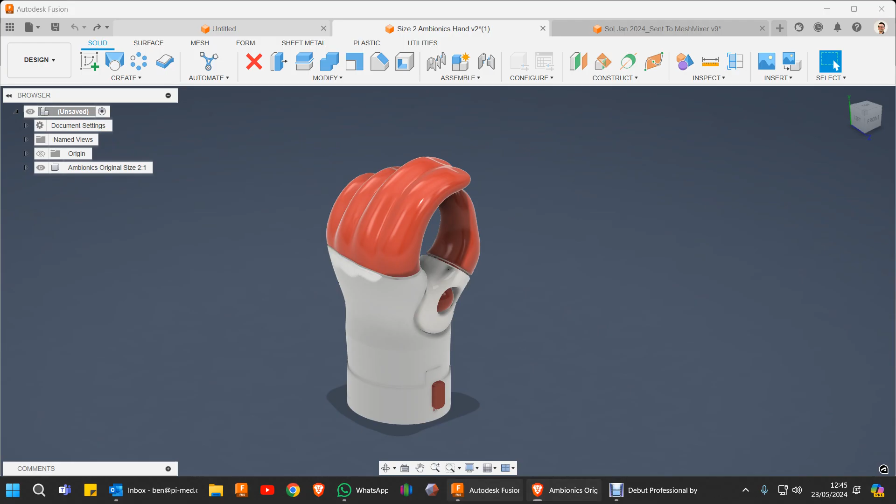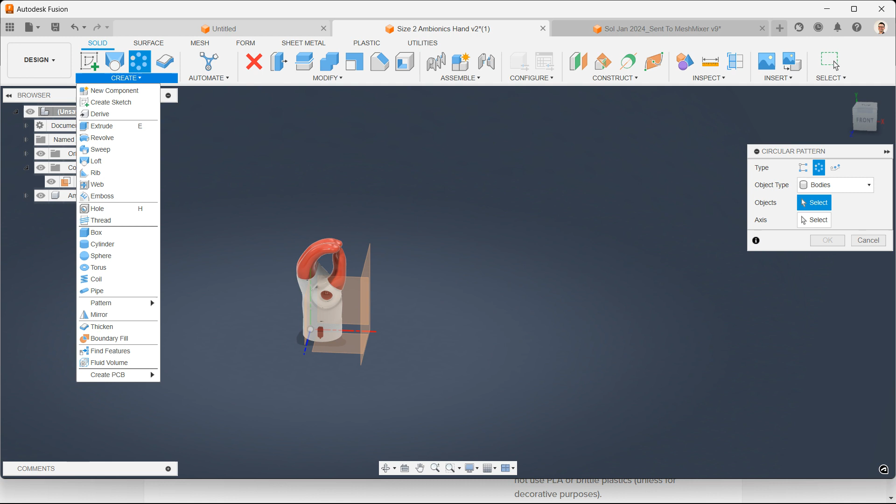So the first thing we need to do is align it and mirror it if necessary. Now I always make arms for Sol, he's left-handed, you might need a right-handed socket. So in order to do that, just quickly mirror it. So bring up the origin, offset a plane that's some distance away from the object, and then you just come up here and create mirror. Select the component that you want and then the mirror plane.

So that works for the split hook equally, and there we have it. So that would give you the mirrored version. We're working with the left one today, so that's the one we're going to proceed with. What we need to do now is to align it. It comes in basically as if it was on a 3D print bed.

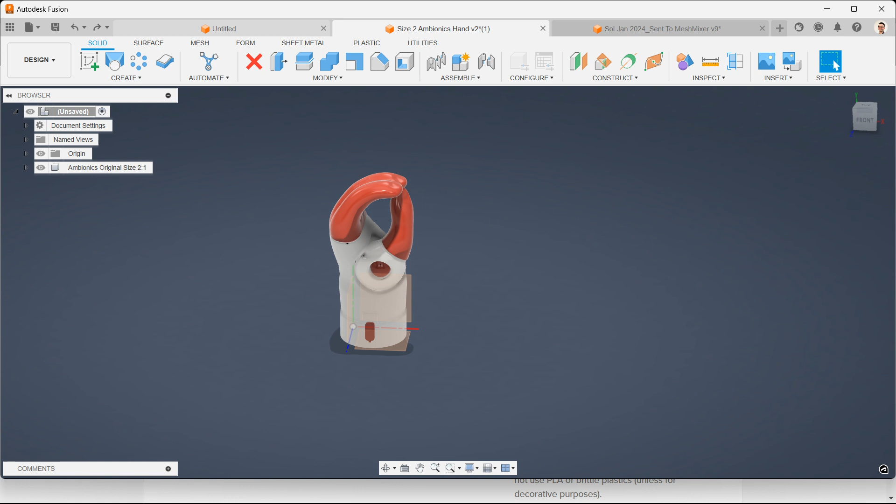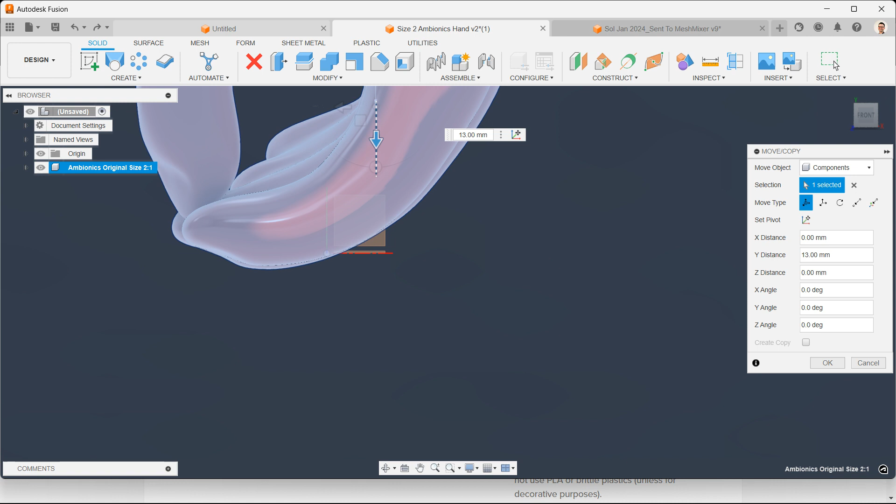What we need to do now is turn it upside down for the modeling. So select the component, hit M for move, and then just turn it through 180 degrees. And I like to bring it down so that the tip of the thumb is on the ground plane. And that will be obvious why I'm doing that in a moment. Roughly there. That's about right. Okay.

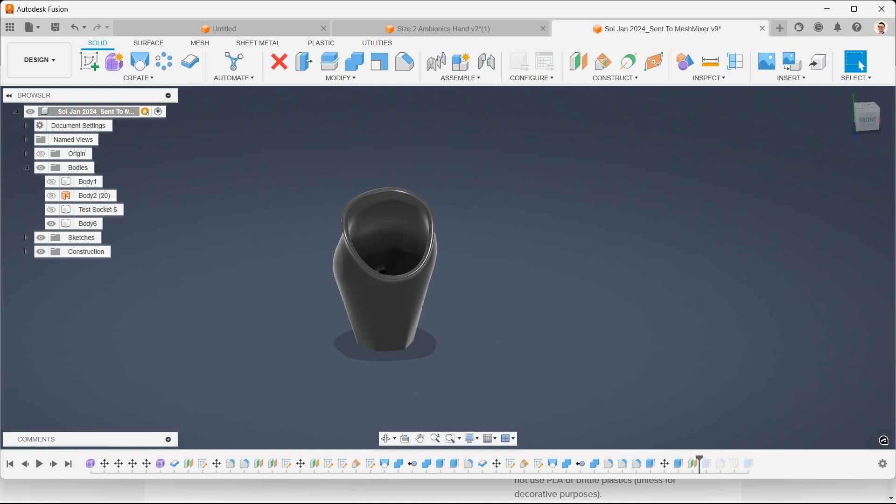Once we've done that, we bring in the target geometry from the socket that we've already modeled. So you might have taken a cast or done a 3D scan and then followed the process to create a socket like this. So here's one. This is actually the socket that Sol's wearing today. He uses a completely different system, so I use the PVC tubing. But for today's purposes, we're going to use the socket geometry.

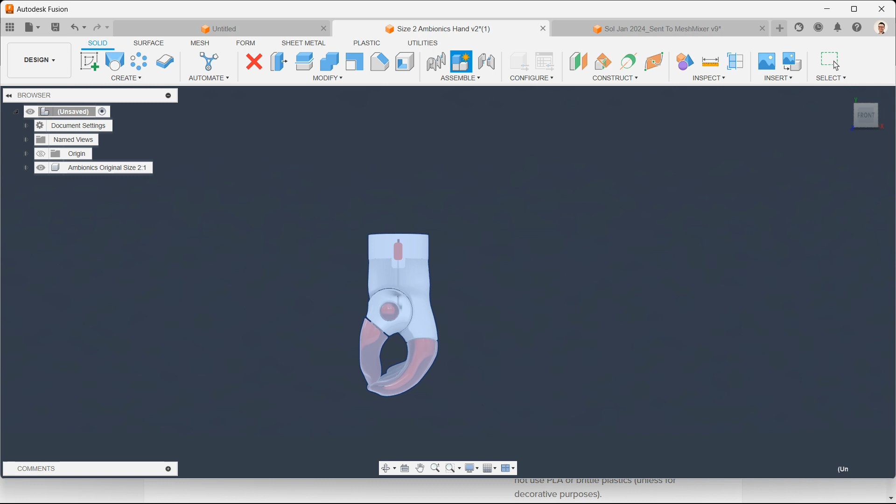So take the 2D surface that you created, copy it, come back to the folder that you've just opened, and this is important. So right click on the top and select do not capture design history, click OK, create a new component, doesn't matter what you call it, and then right click on it and paste the geometry that you want. OK, and then go back to the parent component and capture design history. So now everything we're going to be doing is going to be parametrically modeled.

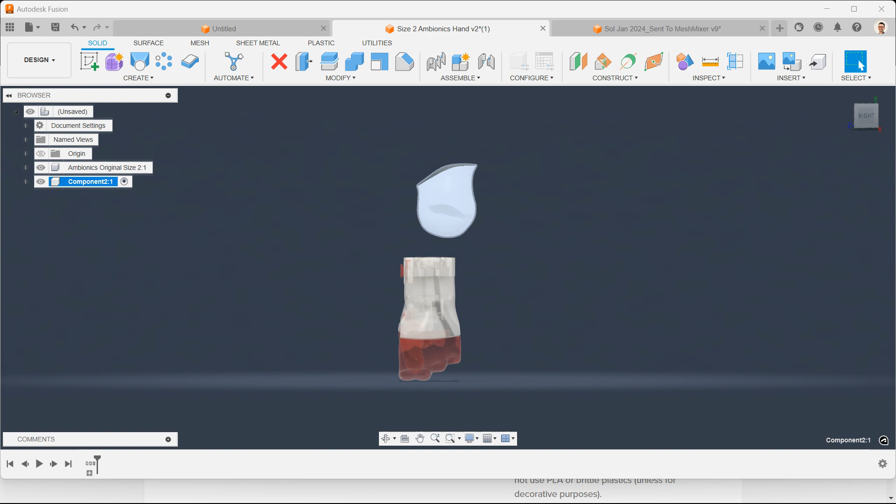Right, so we've got our socket. It's not quite lined up yet, so let's do that next. So we pick the component, hit M again, and just roughly center it above the hand. Looking from the front view, you want to center it so that the apex or the bottom of the curve for the socket geometry is somewhere lined up over the release button, about there. Okay.

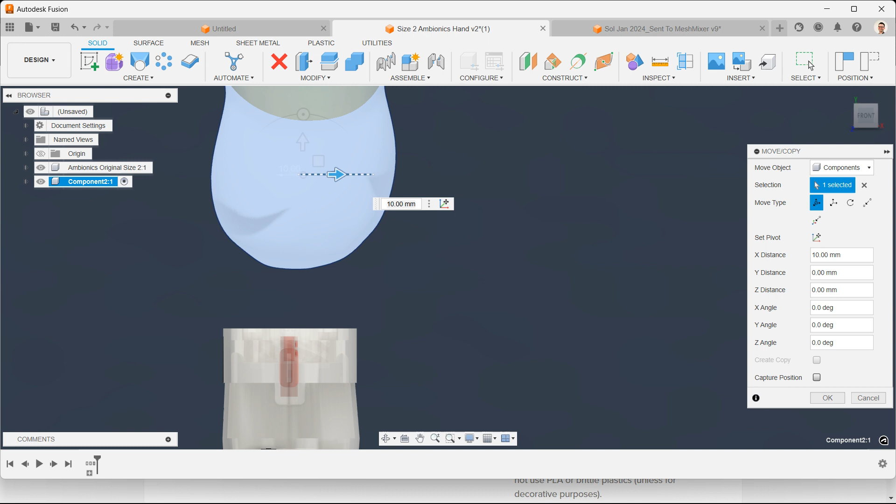Next, what we need to do is create an offset plane to give the distance from the crease of the elbow. So Sol has a very short below elbow amputation, but he does have a crease, and that's the point where the anterior trim line on the socket goes. So that needs to be in the corrected state.

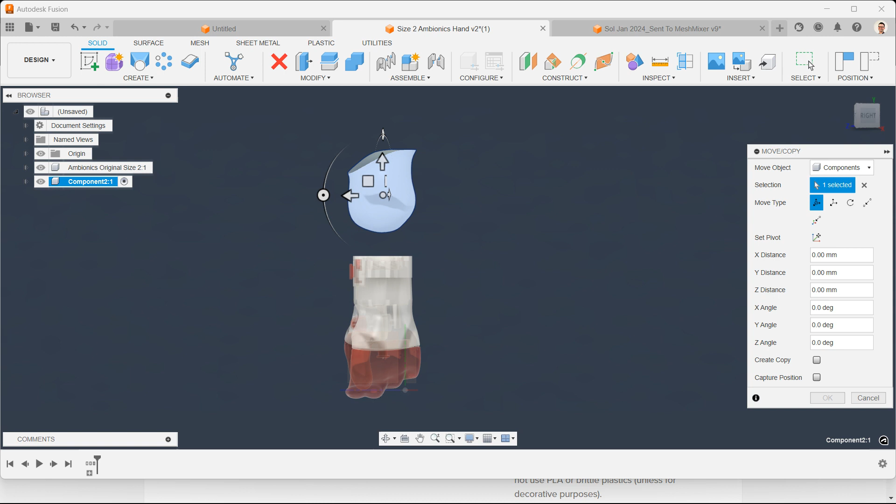So we'll pick the model again, hit M one more time, and I rotate my sockets around about 25 to 30 degrees. So what this will do is give a more relaxed position when it's being worn. The arm would never be 180 degrees. Nobody walks around with their arm completely straight. It should be roughly anywhere between 20 and 30 degrees to be comfortable.

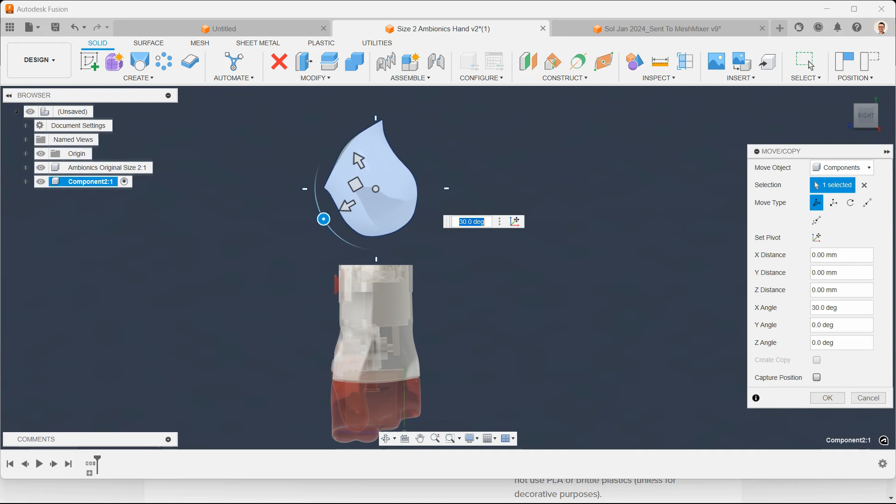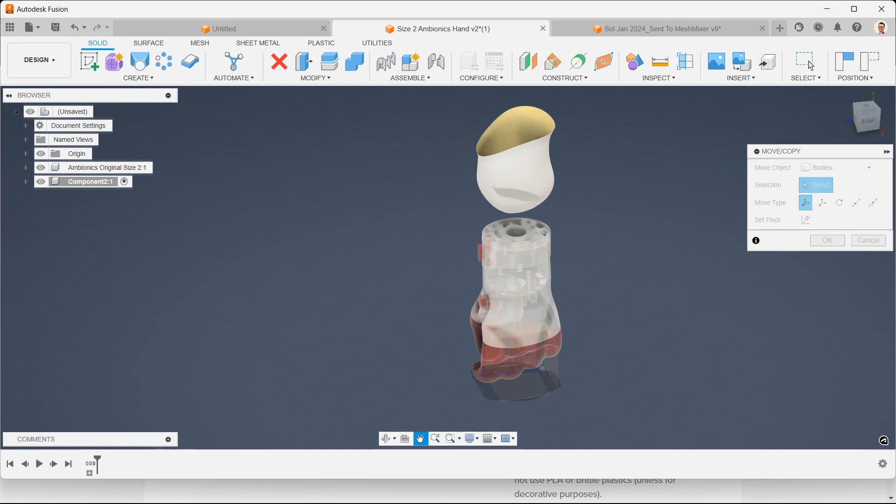And also, do I need to change the alignment at the front? Yes, I do. So I need to just swivel that around. So undo that step. So I want to bring my about 10 degrees that way. Okay, and then 10 degrees, 30 degrees that way. Pick the component, M.

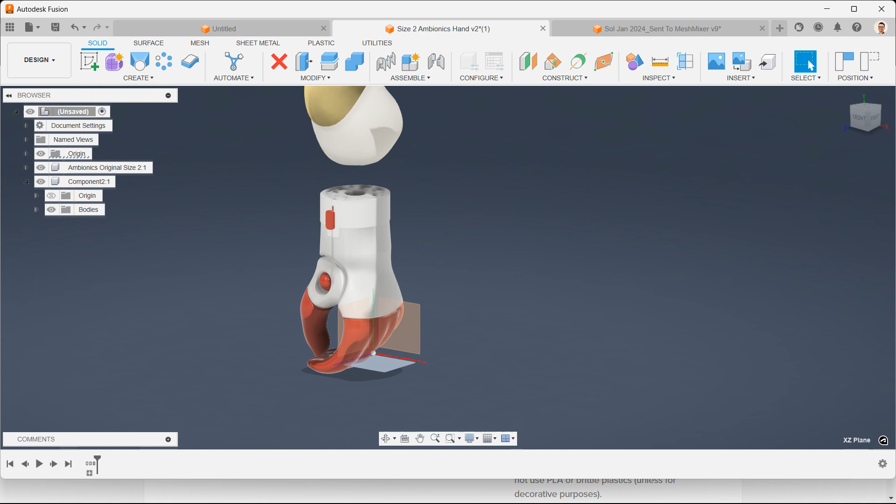30 degrees, there we go. Okay, so now select the parent body again, and we're going to create a construction plane, taking the ground plane from the origin, offset it, we'll capture that position, and then we're going to put it to the position where the trim line should be, so that's 230 millimeters.

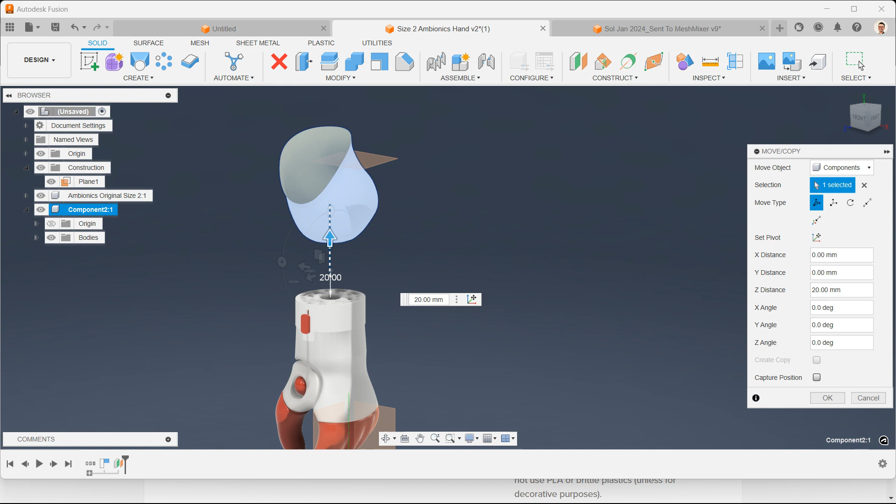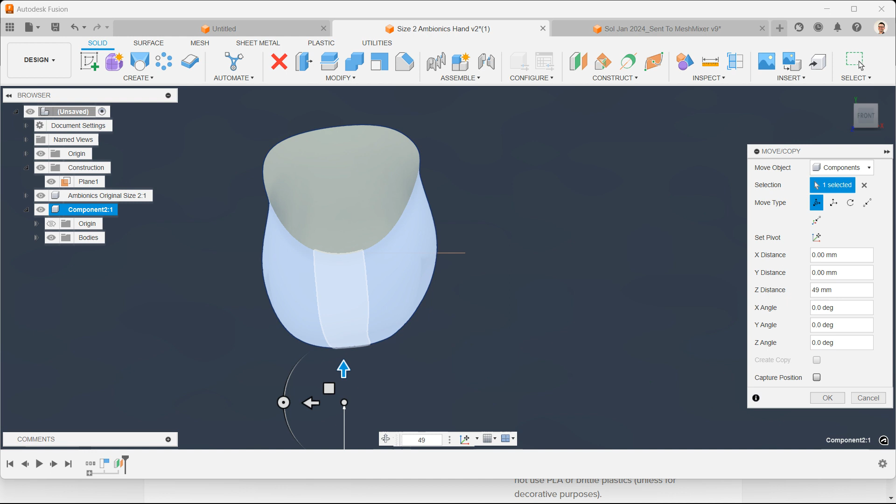Now I take my socket, hit M again, pivot point, select this inner circle here. That will give me a nice flat edge to lift off, and then bring it up so the trim line is touching right, around about there, a little bit lower. Now 5mm is actually noticeable, people, so try and get it dead on. So that's about right there then. Yeah, that intersects with the right place. Okay, so we have the socket lined up.

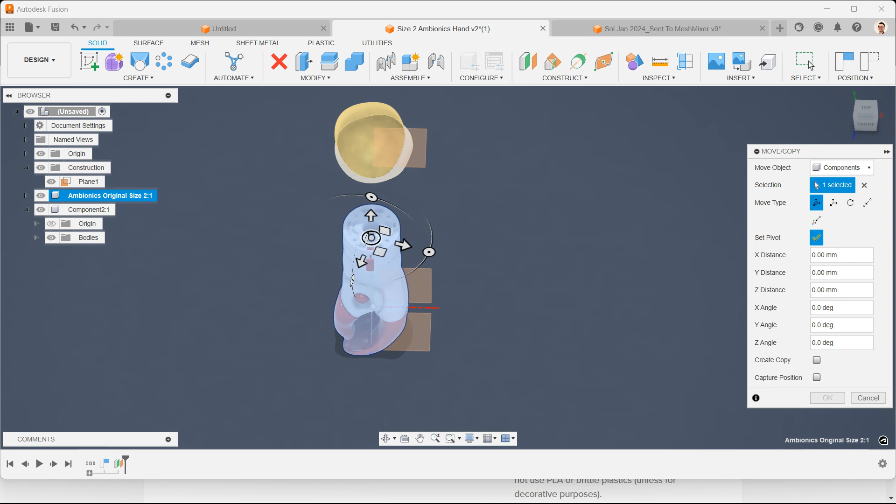Now we need to line up the hand as well. So in this position, the hand would be dead straight, like it's reaching out to hold a cup of tea. What we want it to do is be a more relaxed, natural position by turning the hand in slightly. So pick up the hand, hit M again, and then we're going to select that same pivot point so that we rotate it through its own center. Hit the green tick, and then I think about 15 degrees should be enough. And that'll give us a nice, relaxed, natural posture.

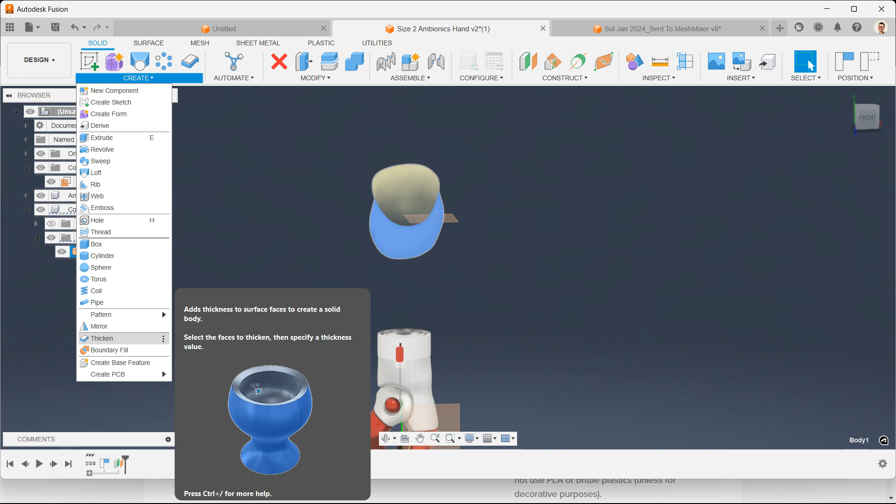So let's crack on to actually making the socket itself then. Now we want to highlight the component, our body surface, and then we go to create, thicken, and I've put that in my shortcut menu up here. Capture the position, and it's already done it. If I was printing this in a test socket, then a couple of walls thick and 1.8mm is fine for confirming fitness. To make something rugged enough and durable enough for everyday life, I like to make it 4.2mm if I'm using colorFabb varioShore.

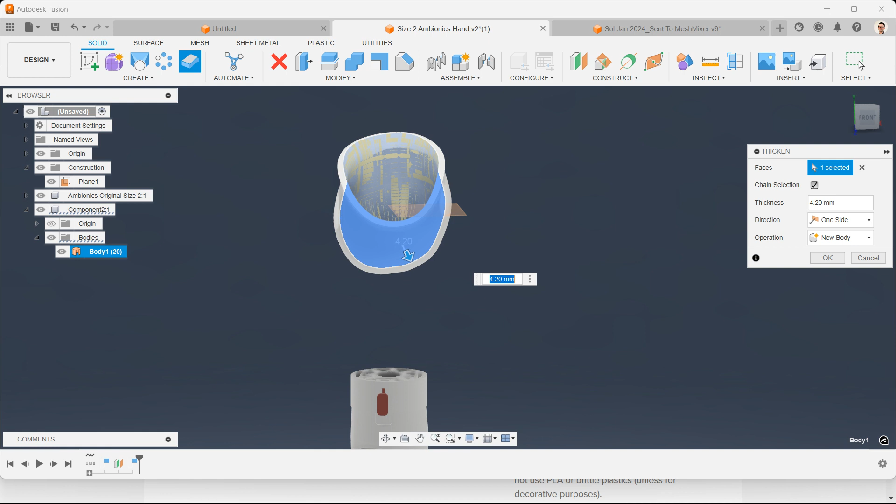There are other TPEs that you can use. Again, something chunky like 4.2mm will be perfect. The socket body itself can be a little bit thinner because it's tubular and it actually has some rigidity in it. So we're going to OK that, 4.2mm. That's going to give us our Vario Shore socket at the top. That's all done. Just to make things easier from this step, I'm going to change the visual style to include visible edges. And now you can see what I'm doing a little bit more clearly.

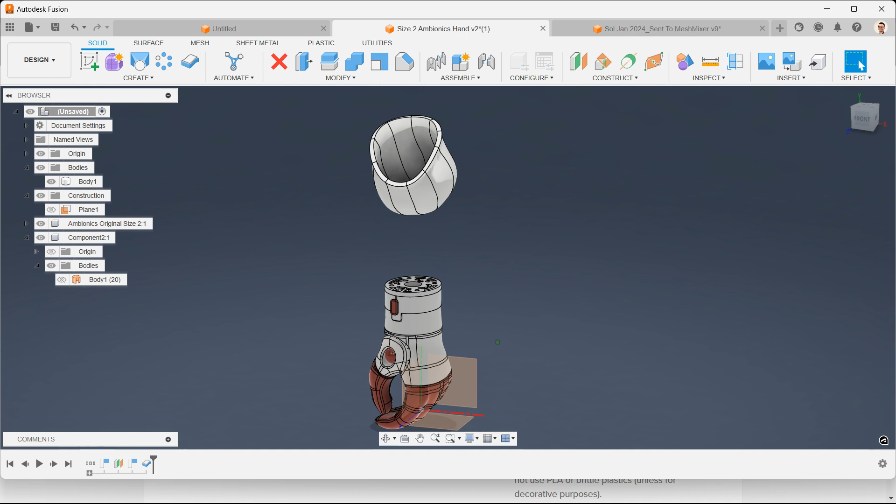So what we next need to do, turn that plane off, and we're going to take a profile from the socket to create the top of our loft. So just zoom out slightly, pick up this plane on the origin from the side view, create a sketch, and just any old way, just somewhere around about the anterior line to somewhere at the back of the socket, create a single line, finish that, that's okay.

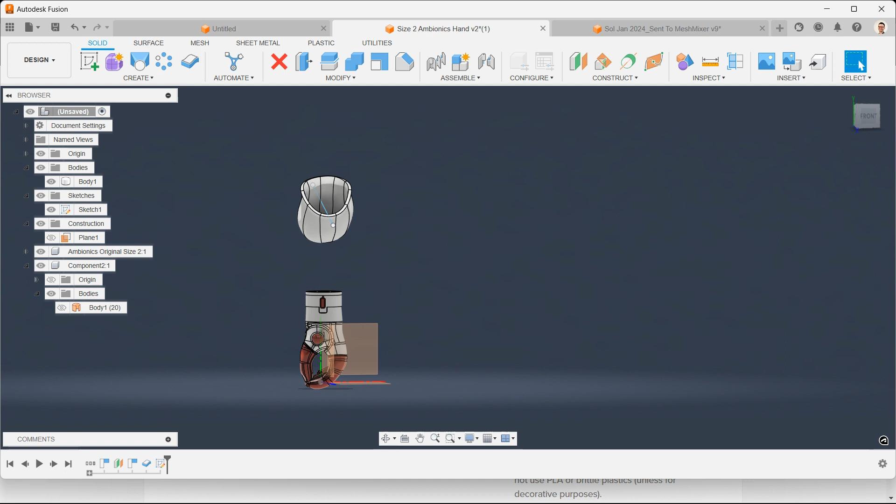Now we need to construct a plane. So we could plane at an angle, and this will bring it in the sagittal plane, but we want to just change that by hitting 90, and that gives us the plane that we're going to take a profile cut through this socket. So we can go back and turn off that sketch, create a new sketch, and we're going to hit intersect. Once more, it's on my shortcut menu. You can get it from down, project, include, intersect.

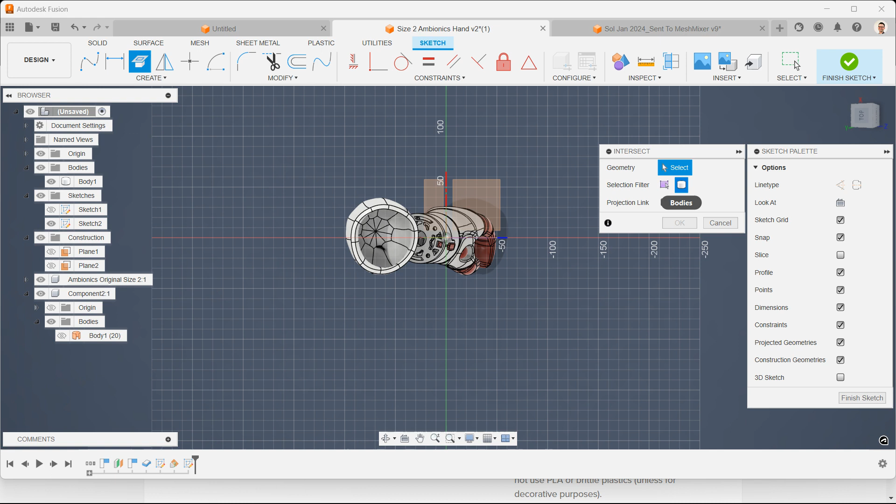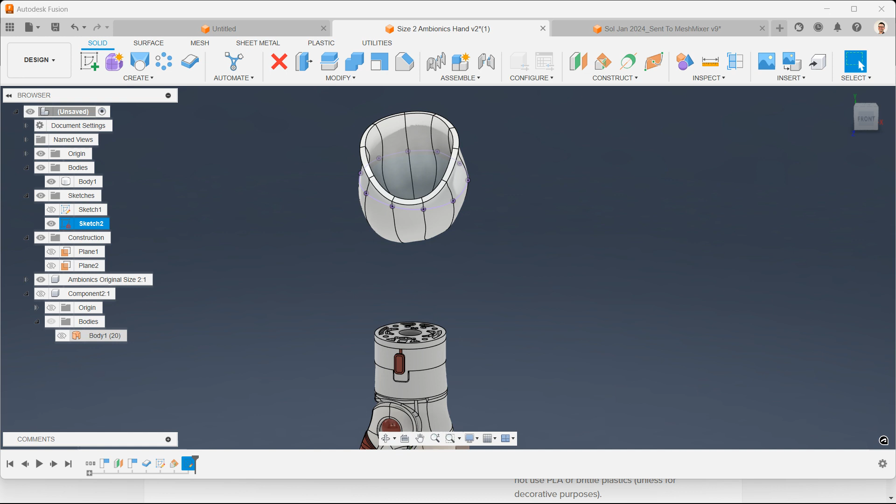So hit intersect, make sure it's set to bodies and not specified entities. Hit the body with a projection link, include that. And that gives us two profiles, the inside and the outside, which are 4.2mm distant from each other. Select the inside one and just delete it, we have no need for it. And finish the sketch and turn off that component. Oh no, yeah, we don't need that one anymore. Turn off that body as well.

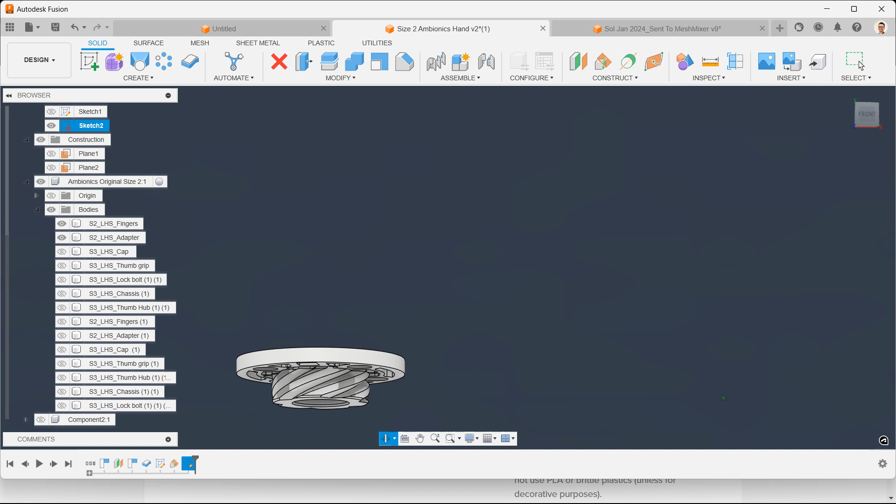Second up, we need to take a profile from the top of the wrist adapter. So this is going to be permanently screwed. So if you look at this, the hand itself, turn all those off. So this is the part we're interested in. This is the adapter. I print this in TPU, I've moulded them, I've tried more rigid plastics, and I can say that TPU is best. TPU will, in the event of a severe bang, allow it to fail safely, so you'll be able to just pop it back on again.

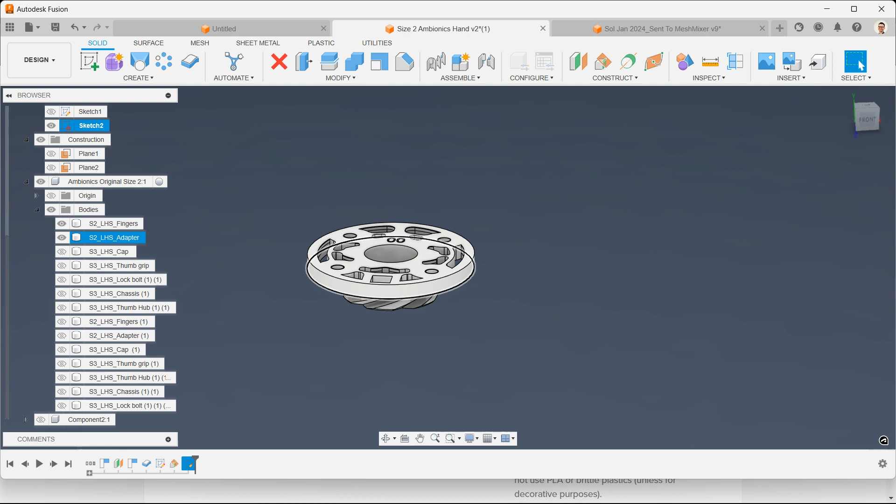So printing this in TPU, this is the adapter plate that mechanically fits to the bottom of the socket. We need to right click on its surface and offset a plane, and then create a sketch on that plane, and we're just going to capture the outer edge. So just this outer edge for now.

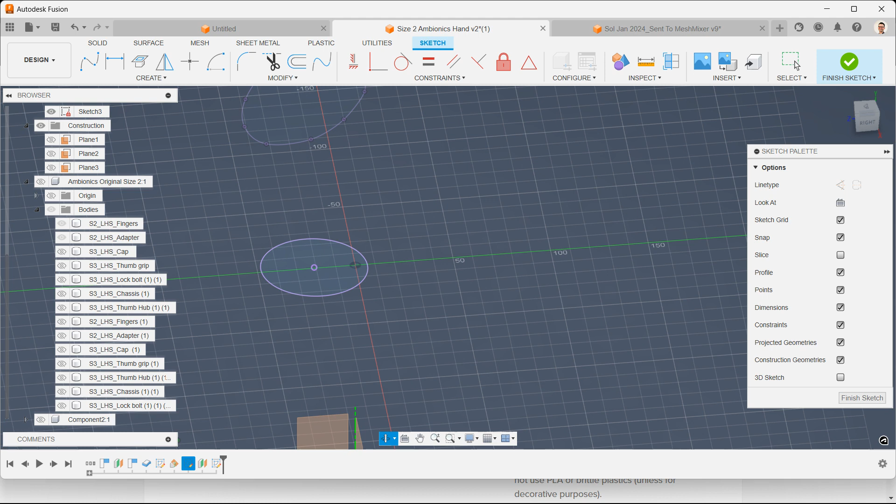It's done that. Now we can turn off that body and we have our two lofting planes. Finish the sketch. Okay. Next up, we need to create a loft. So it's create loft. Pick the top profile, pick the bottom profile, and just OK that.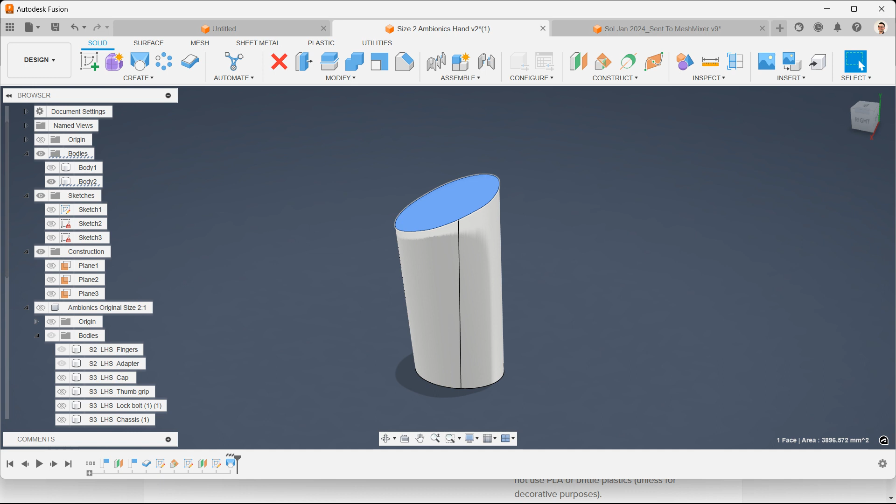Select the top face of the profile and then go to modify and shell. The walls of this should be 3.5mm thick, and that will have a closed end at the bottom, so select the closed end and delete that. That will now give you a tubular structure. Let's bring our socket body back. We can see there that that line bears no relationship.

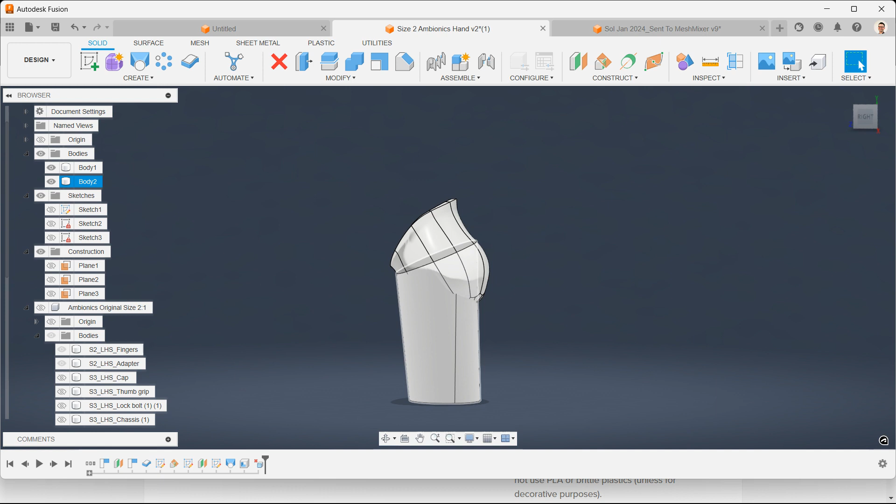So we'll bring our first sketch up, and the great thing about Fusion is we can now modify this and get the shape that we want. What I want to do is make it as printable as possible, so I don't want any steep overhangs, so I want to come just underneath this lip, and I want to have a nice natural shape.

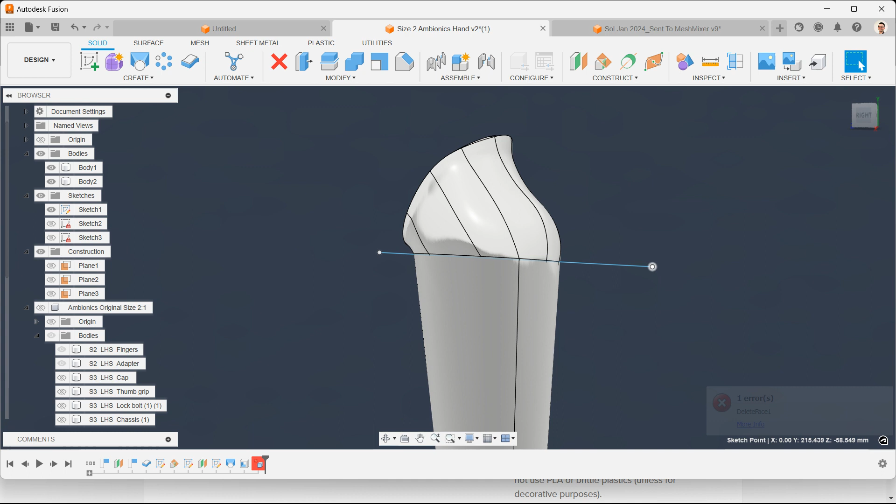Ooh, that one didn't work. So that wouldn't print very pretty. That comes in too close. How about down that way? You can just play around with it. That looks pretty clean. Later on we're going to apply a fillet to that line, so you don't want it to be too convoluted and running around all over the place. That looks like a nice socket shape to me. So we'll OK that. And again, you can play around with it later.

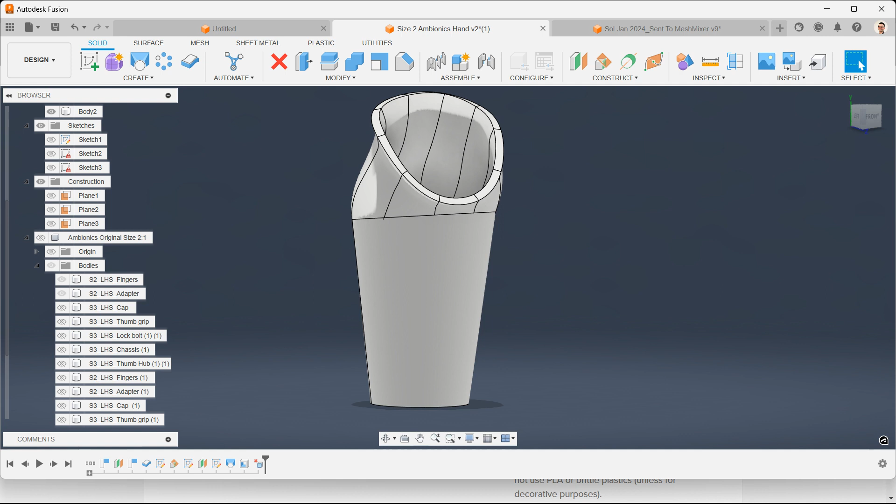The next step is to join these two together. So we need to do a cut and combine. So pick combine. We're going to cut the bottom piece with the top piece. Select cut. Keep the tools. OK that. That might introduce an additional piece of unnecessary material. We're lucky in this case it didn't. Otherwise, if there's anything left over, just highlight it and click remove.

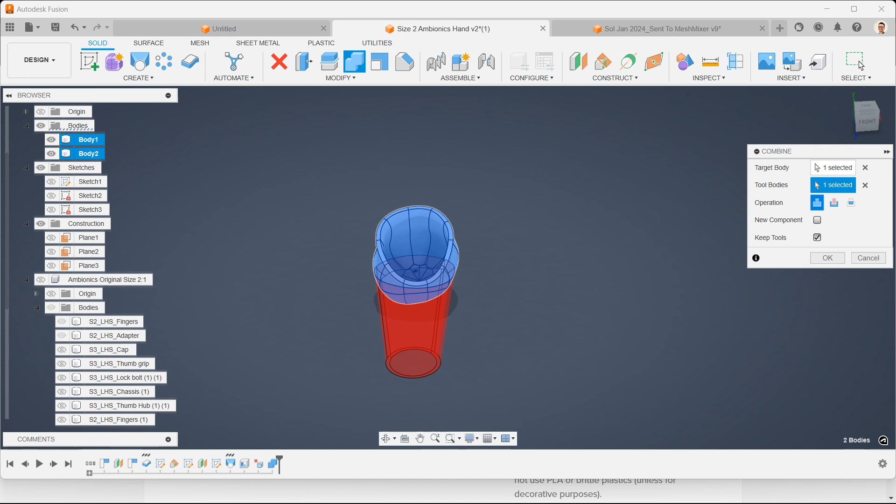Now that we've done that, we're going to join these two pieces together. So again, pick both sides. This time it's not a cut operation and we don't need to keep the tools. So that's our basic socket shape. Close that off and bring open the hand again.

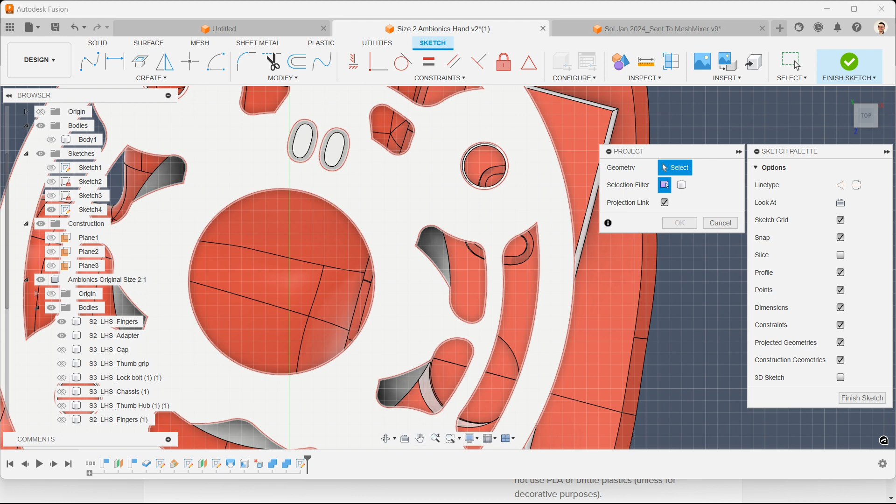We've already created a plane, so just reuse that, create a fresh sketch, and there are 2 points of interest that we want to pick up here, which is the inner diameter of one of these screw holes. So press P to project, pick the inside edge, that should be 3.5 millimeters, and press Control and select the other one as well, which is the internal axis. Should have both of those. Turn that off. Yeah, we have.

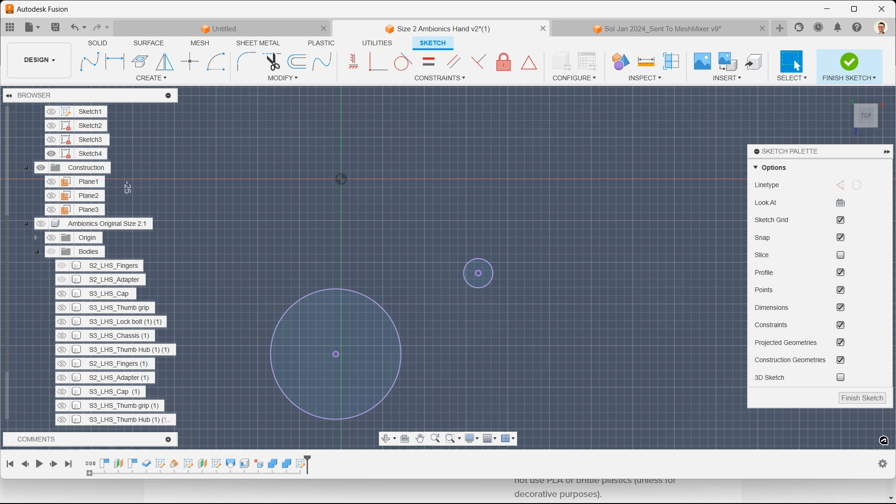Now what we're going to do is create a rib using this screw hole, so it needs to be fairly substantial. So what I'm going to do is offset from that 2.5 millimeters, which gives me a circle of 8.5 millimeters. Now we need to connect the centers of these two circles here using a straight line, and this will give us the angle that we need to send the ribs into the socket.

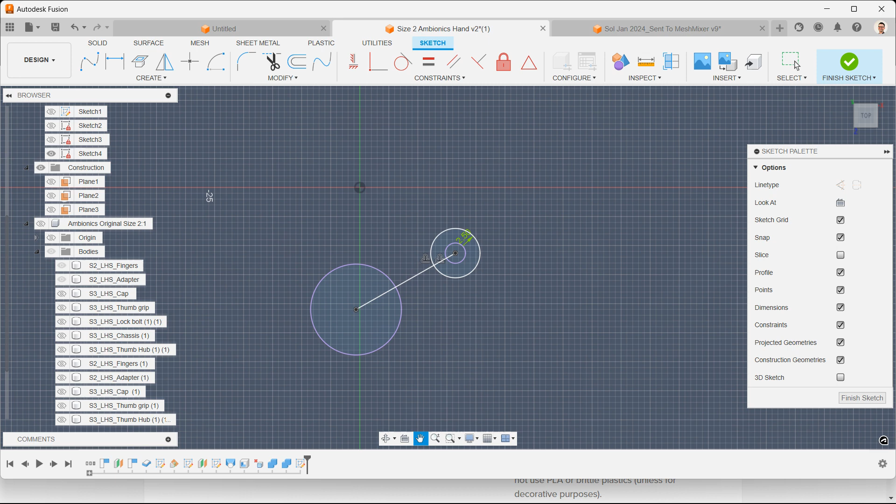Press L again to connect another line, and then just play around with it until you get the collinearity sign. So we know now that that's one continuous straight line. Hit the line that we've just made, press O to offset it, and then type in those measurements, which was 8.5 millimeters divided by 2. So we've now got a tangent line on the one side.

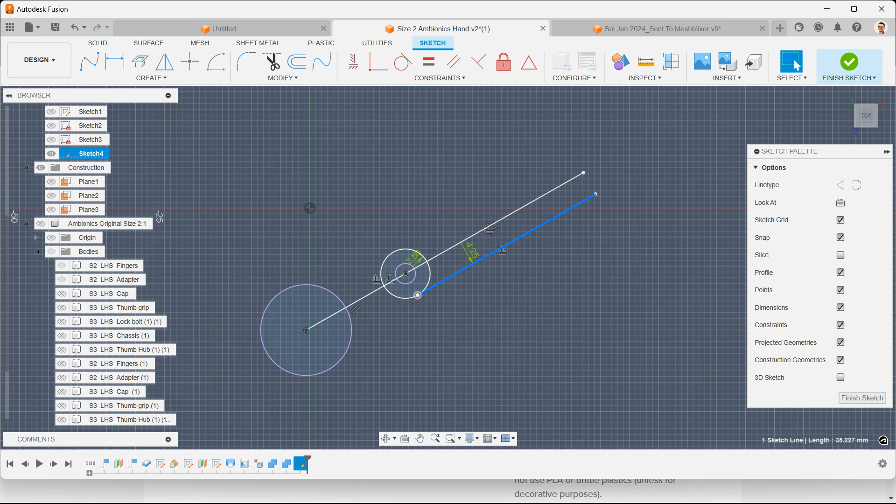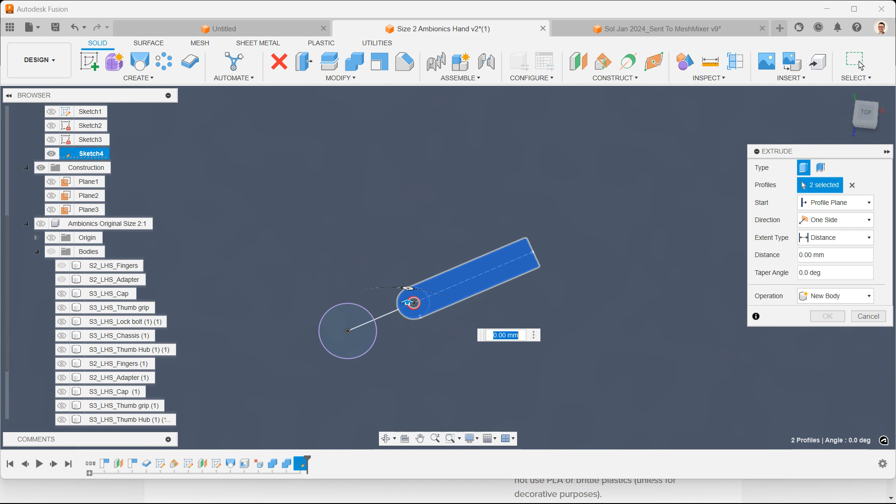Close that off by mirroring, and then connect up the ends so that we can extrude this geometry. There we go. Finally, just turn that into a construction line. Okay, so we view the sketch. We're now going to extrude this upwards so that it's much taller than the socket. So a nice number for me, knowing that it's 230 mil, is extruding at 300 millimeters. Make sure that you picked up both of those profiles, and then just manually enter in 300 millimeters.

Now the sketch that we were just working on will disappear by default when you finish that operation, so just bring it back open again. Now we're going to go to create circular pattern. So in the menu, that's down to pattern, circular pattern.

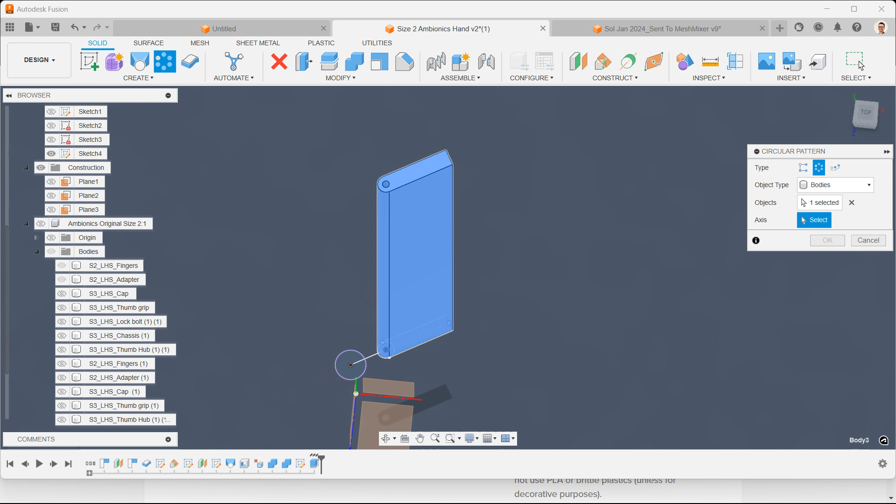We select this body and tell it to use the axis that we picked up from the center. I think it will usually default to 3 pieces. Make sure the quantity is 4, and that's how the adapter was modeled, so they should pick up perfectly. We now have what will become the 4 ribs to reinforce the inside of the socket.

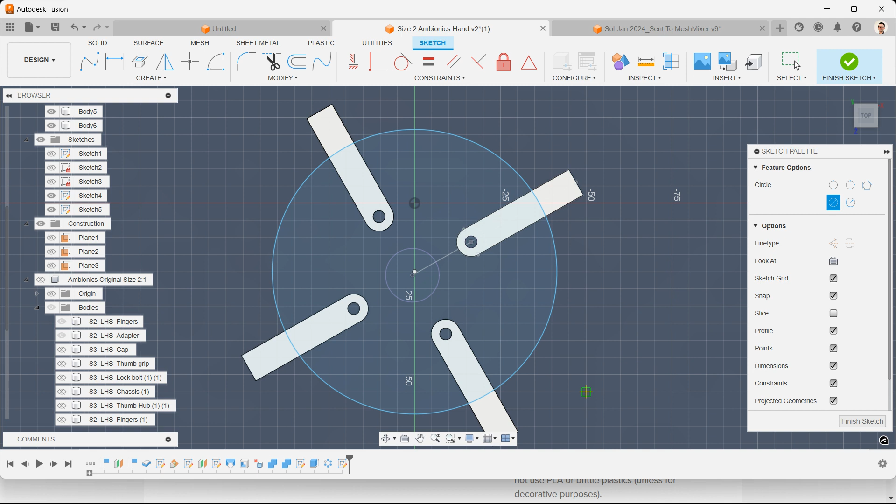Next, highlight the top of one of these, create a sketch. This is just a tool body. We don't need to use a plane, just a circle, as long as it covers them all. Pick up all of those profiles, hit E to extrude. 1 millimeter is absolutely fine, it just needs to be a physical object. We now have our rib cutting tool.

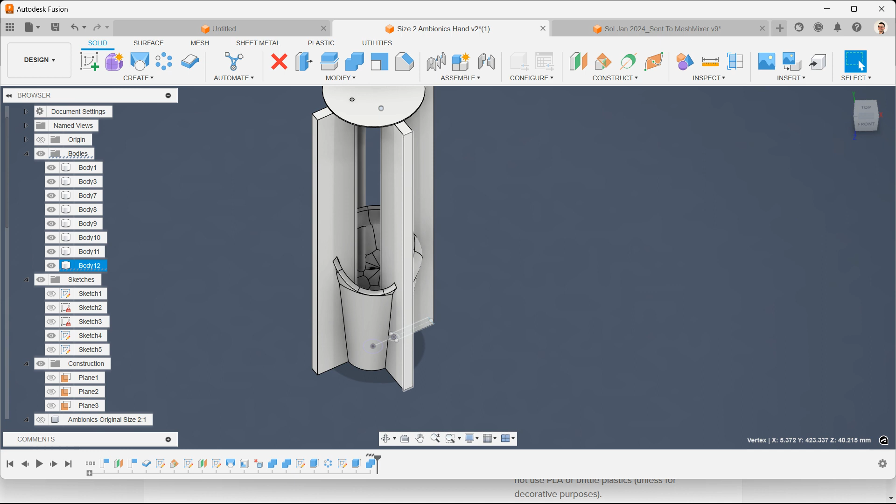From there, bring open the body again of the socket, and we're going to cut the rib cutting tool with the socket that we've just designed. Make sure you keep the bodies on, and OK. Highlight the top face of the rib cutting tool and hit V to make it disappear. And what we want to do now is get rid of everything that is not a rib. So by a rib I mean one of these 4 bodies that are left over.

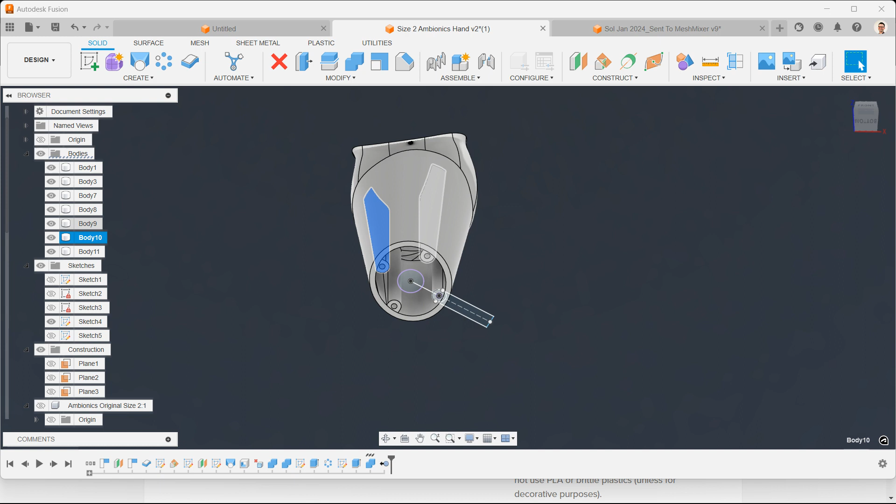So we know that that is removable. That's one of our ribs, so we're going to keep that. We're going to keep that. Keep that. That's not a rib, so we can remove that. That's actually in the top of the socket. There are two pieces there, you can see. So we'll right click and remove. Don't delete, just click remove. Then there's this other one here. Again, remove, just keep the workflow nice and tidy. So now everything here is either a rib or a socket.

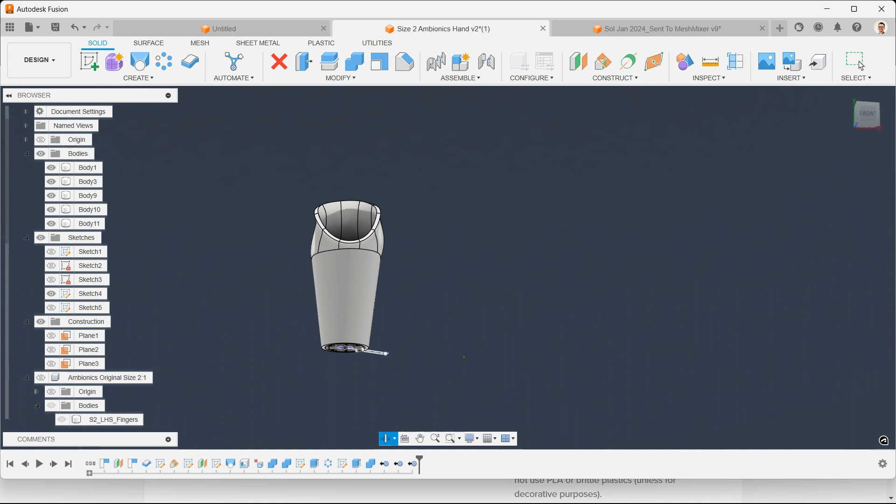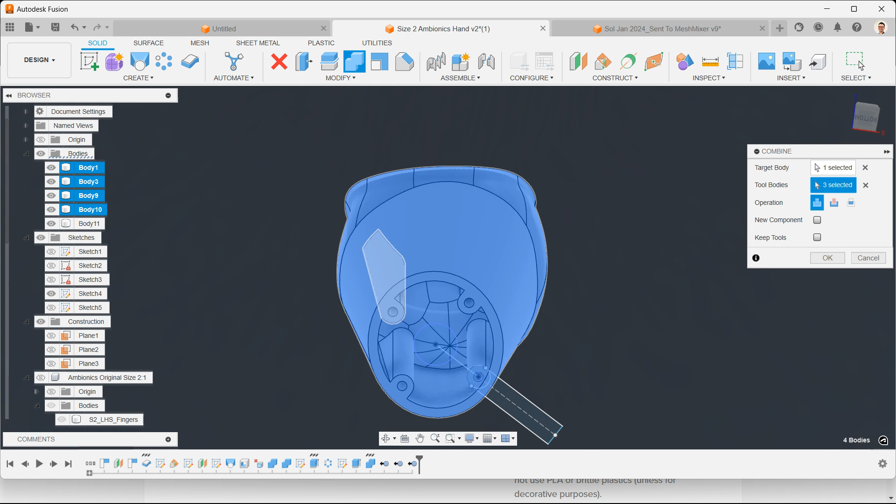Final step then, as you might have already predicted, is to join all of those together. So we just select the socket and hit join. We don't need to keep any of the tools, and just manually pick up each one of those. You'll see when it's selected because, deselect it, you lose this line here and you can see that it's continuous then. So it says we've got 4 bodies. So we've got 1 target body and 3 ribs selected. Let's just get rid of that sketch, and then we can see that they've all done nicely.

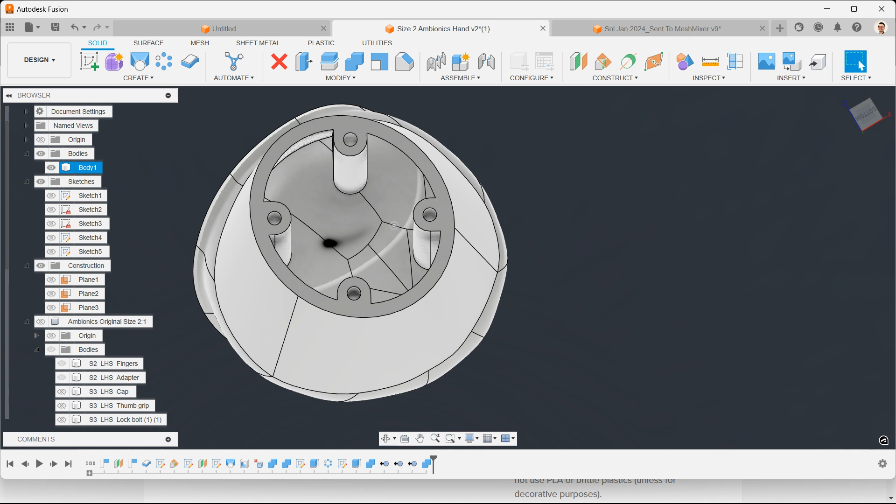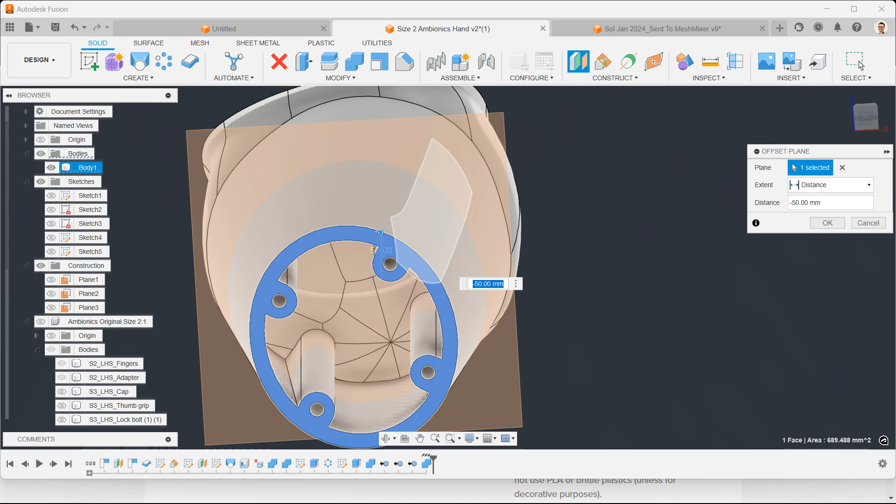It will print quite well like that. You have to have some support material on the inside, which can be removed away later. I found that with ColorFabb varioShore, that's absolutely fine. If you wanted to, you can create a flattened surface here, to give you something better to work off. So offset the plane. Just to give you a contact patch there.

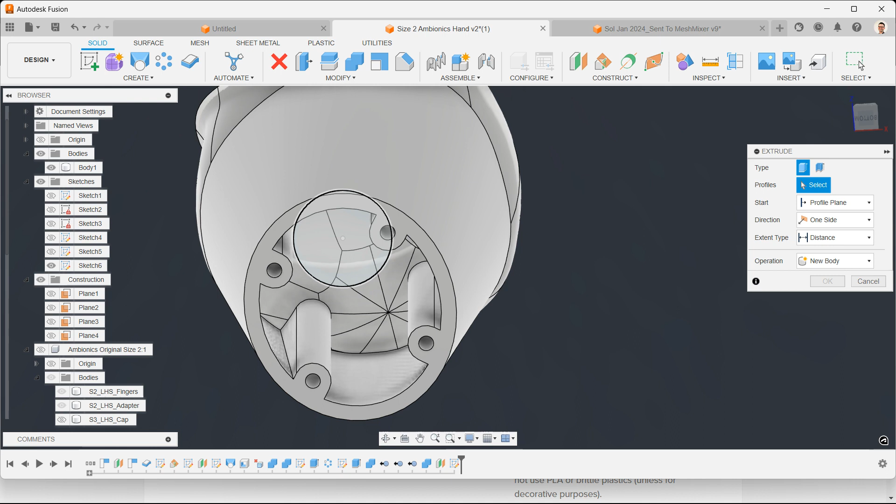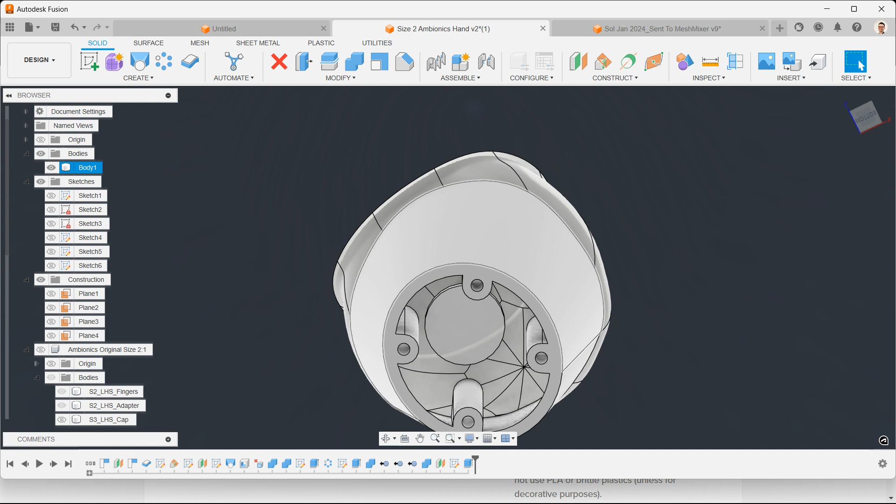Create sketch. Just have a circle. There. Extrude that down. Yeah, it's not interfering with the inside. So we've still got our socket geometry on the inside, and now we have an additional bit of material that can be printed up to. The socket in varioShore of this size would take about 13 hours using a 0.4mm nozzle. So be prepared for a long print. We don't want anything to go wrong, so it's best to take these steps now.

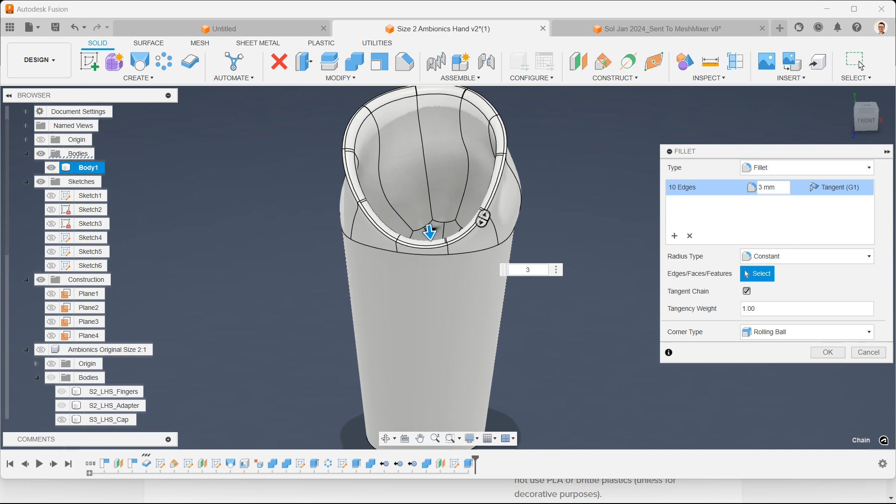Final steps then, we've got a 4.2mm thick socket at the top, so we can easily afford a 3mm fillet so that the upper trim line rolls away from the body. Click OK on that, and then 1mm will be fine for the edge. I like to put a large fillet on this joining line. So I'm just going to adjust this slightly more, and we've got a bit of a convoluted line along here, but I think that should be fine.

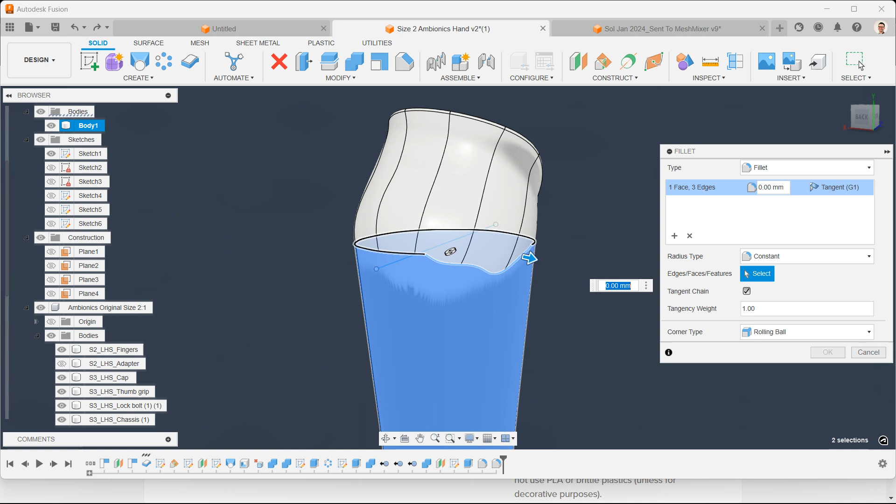So select the 2 areas. F to fillet, select those 2 areas, and then I'm going to try, no, how much can I get away with? 13mm is fine.